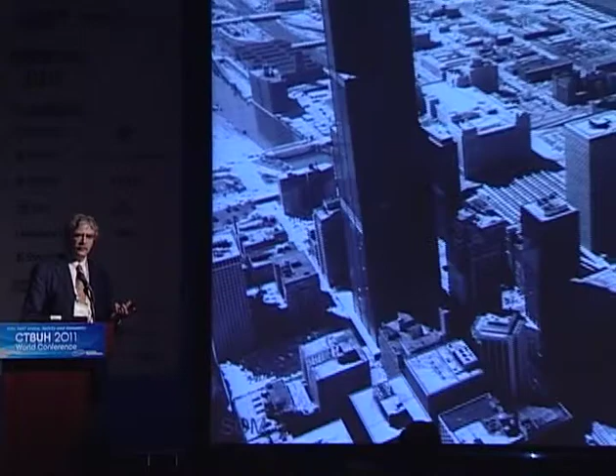I'd like to start by talking about a simple programmatic move to an existing tall building. This is the Willis Tower in Chicago, formerly known as the Sears Tower. We think about tall buildings and the effects on cities and developments, but one of the things I think we should consider is the change in typology over time and what small programmatic changes may mean to the use of a very tall building.

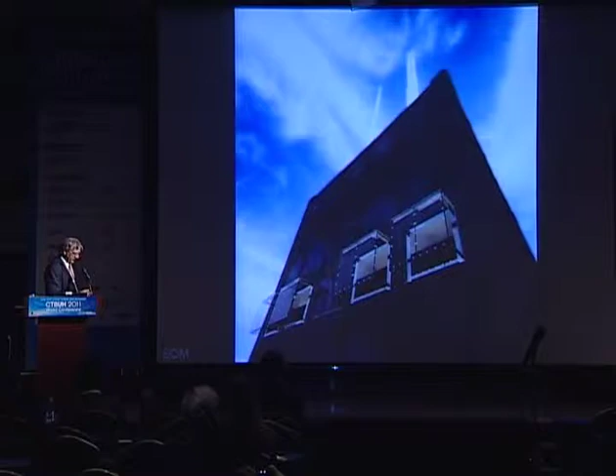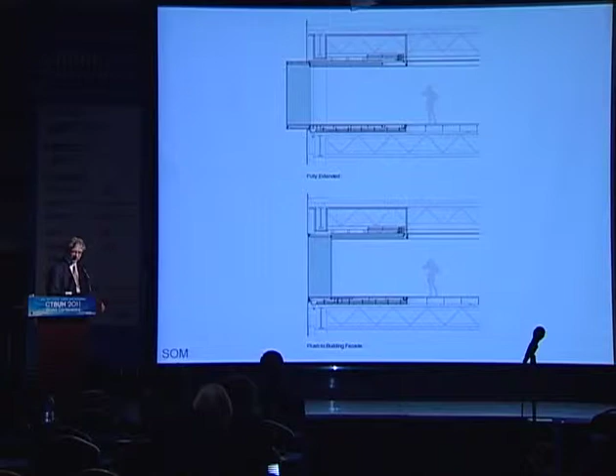So the idea was to introduce a way to re-experience the observation deck of the Sears Tower. The concept was to create a module that could be moved outwardly and then moved back to allow window washing, and to allow the structure to maintain its original design intent. These modules are actually quite small.

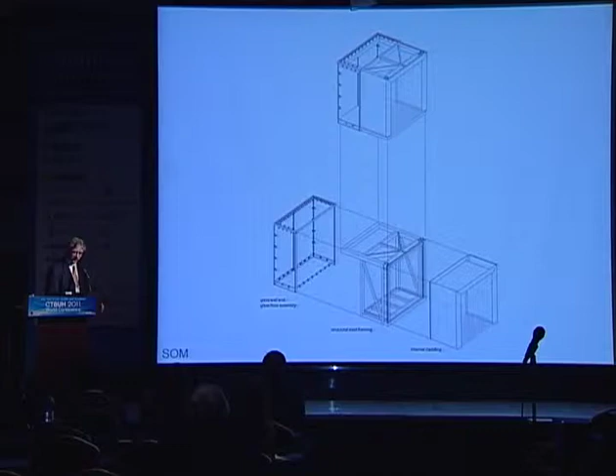There's a steel frame, and a triple glazed glass unit that is inserted and hung from the frame. The idea is that in some ways it's a temporary solution for creating a different experience for people at the observation deck level.

It's on the west facade only of the tower, because of the straight shot of the exterior wall from top to bottom—there are no setbacks below this western face. The concept was to allow people to experience the Sears Tower in a much different way, to be almost on the roof level without any barrier.

The experience would be different, integrated with the surroundings, with nighttime and daytime offering different experiences. But it's a very simple idea, a very simple move to create a different experience.

What's happened in this case is that almost immediately after the ledge was installed, as we call it, there were 10 times the amount of people interested in visiting the space at the observation deck level.

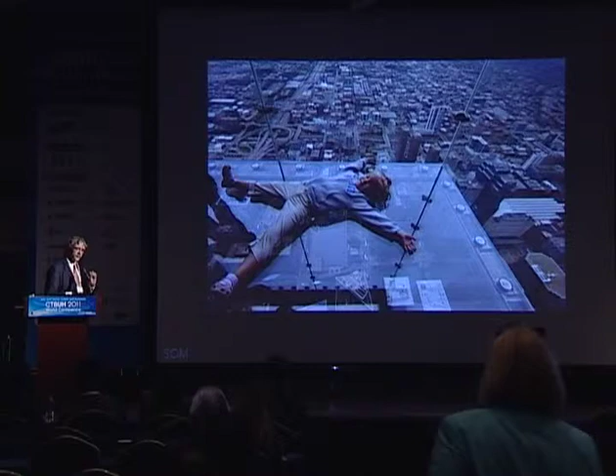So I leave you with this thought on this project: it's about daring ideas. I'd argue that when we think about tall buildings, we should think about spaces, and about what brings people to those buildings. I think we've done a lot of buildings that miss opportunities, and this is perhaps a small way of reminding us what it might mean to create simple, important moves to the typology of these tall buildings. When we think about structures, I think we're restricting ourselves far too much.

The work we're considering at SOM looks at structures at a finer scale, perhaps more of a mesh type scale than a beam and column or large mega scale—the idea that elements are purely in tension or compression, not bending. In response to gravity, wind, and seismic loads, you in fact come up with the most optimal design and the least amount of material in the structure.

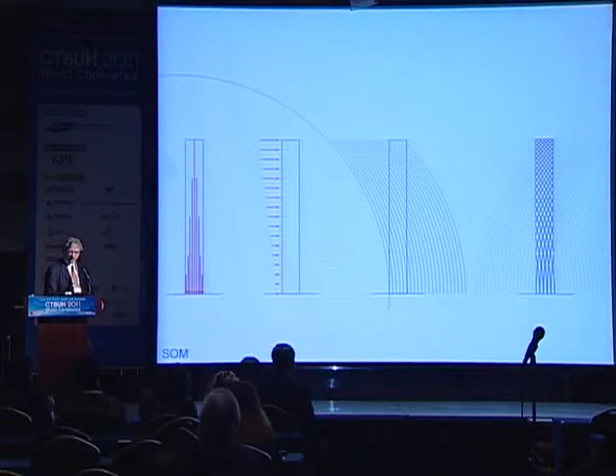It's about a typology. It's about understanding force flow, and it's about optimizing the structure to respond to that force flow, whether it's gravity loads or lateral loads.

We've looked very carefully at genetics in terms of the random association with material and boundary conditions—whether it's the geometry of the tower, both plan and elevation, whether it's fixed conditions at the base, or change in geometry over the height of the building. We're looking for the most optimal way to combine the applied loads against the minimal amount of material.

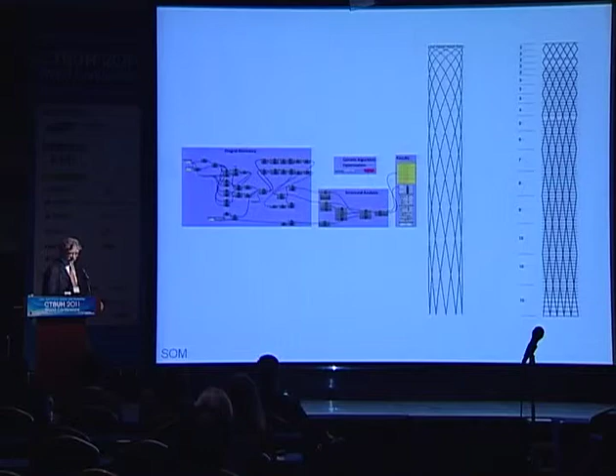So, freeform—I think we're on the verge of defining structures that are far less rigorous than they were in the past, and perhaps solutions that will be far more beautiful as we go forward.

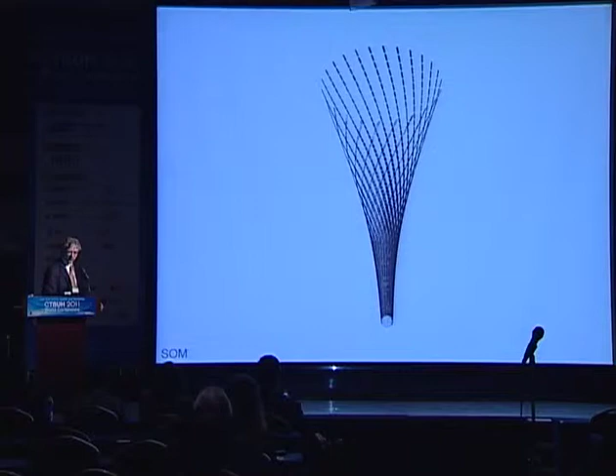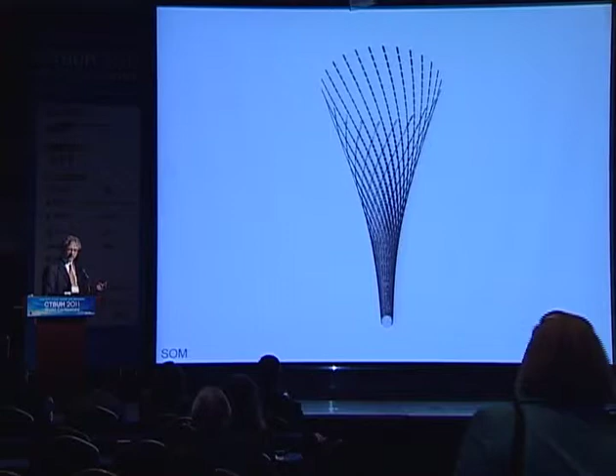I want to talk about towers that have limited program—the idea that we introduce these objects, these structures, in a way that creates and manages energy. In this case, we called it the Oasis Generator, a structure that could use concrete in the center.

It could erode as we got toward the top of the building, changing shape—in this case 9 meters in diameter at the base and 30 meters at the top—using the principles of tension on the outside and compression on the inside to resist overturning. And a concept of moving people from bottom to top, perhaps in modules that move around the perimeter of the building.

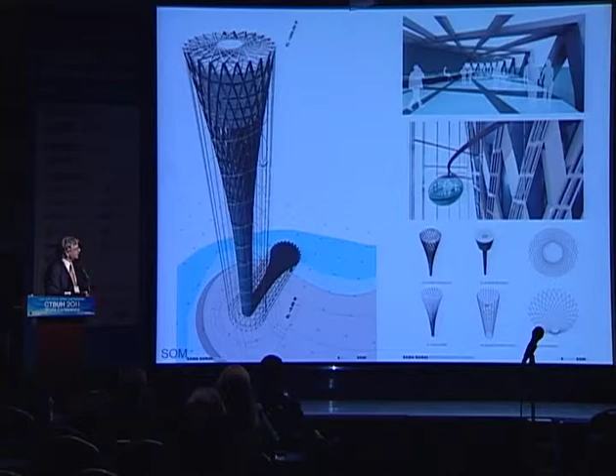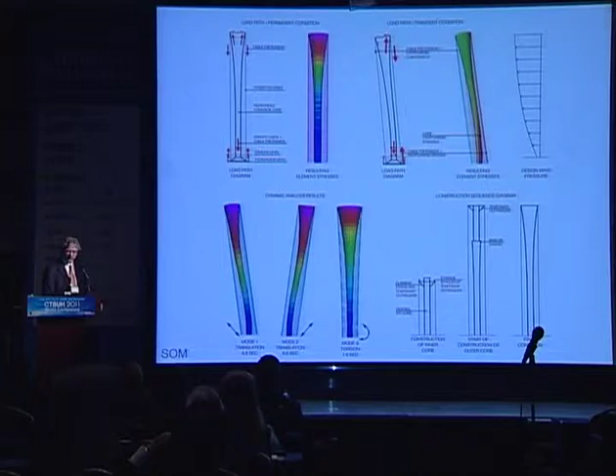It uses again the idea of least material and limited programs, so the top of the building is essentially where all these spaces would exist. Structurally, a very efficient idea—as forces flow through from top to bottom in the center core, there's greater density. We use high-strength cables around the perimeter of the tower to resist the overturning, combining compression and tension in the purest sense to reduce the amount of materials.

The other idea is to use evacuated tube systems attached to the inner core to generate and capture heat, then use that heated water to desalinate water coming from the neighboring environment. This is a site in Dubai, which the concept was originally developed for.

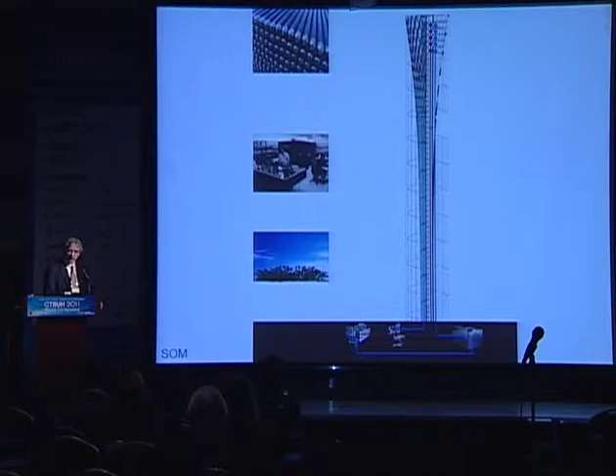The other idea is that as air moves through the center of this shaft, turbines could be used to generate electricity. So beyond the limited program, the idea would be that it would provide energy, and in this case, desalinated water.

Our structures are filled with opportunities. I'm convinced that as far as exterior wall systems, we're only scratching the surface. There's a huge missed opportunity, in my view, as to what we can do to capture energy from the sun, perhaps in this concept, using winds that are affecting the tower in a positive way.

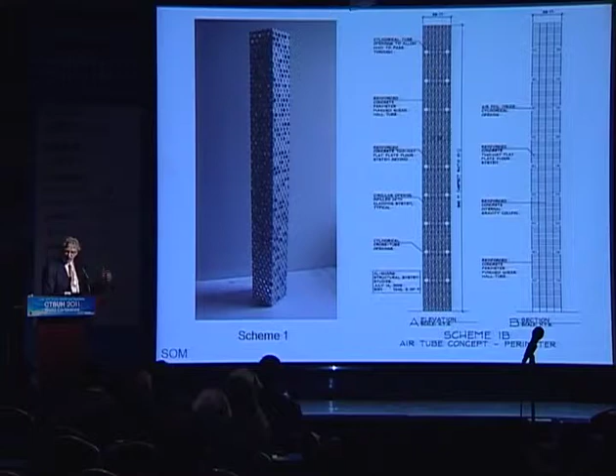So the idea is perhaps to introduce openings along the height of the tower, but not just to allow winds to pass through—an idea that uses a technology we see all the time, the use of airfoils, whether in automobiles or airplanes. We know there's lift and drag associated with airfoils, and we know that the flow around the towers is something we can actually take advantage of.

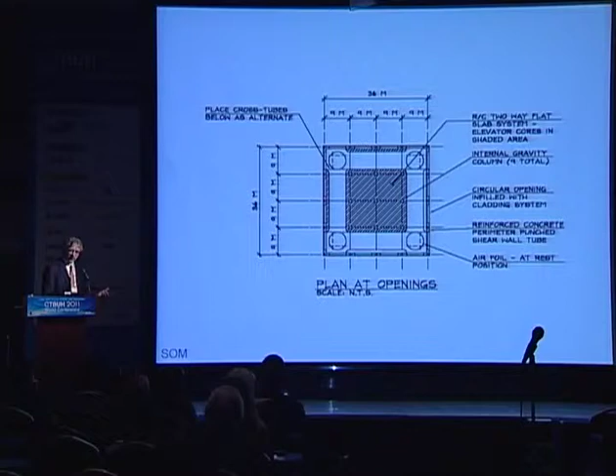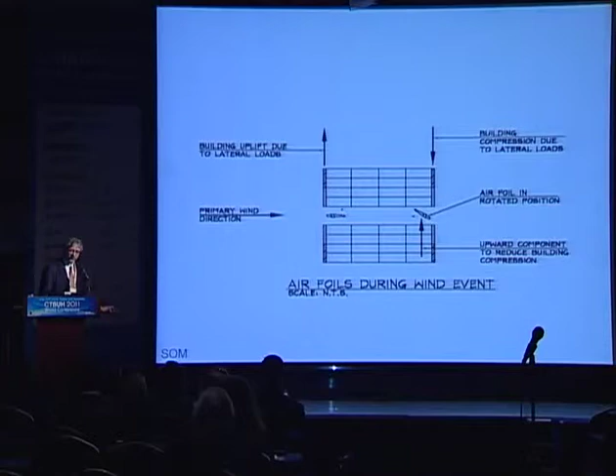Perhaps we introduce these openings, and instead of just pass-throughs and turbines, we have foils. These foils can be used to provide resistance—applied loads, when engineered properly on the leeward side, would form uplifts that counteract the overturning, using the passive characteristics of the wind to develop forces within the structure to create resistance.

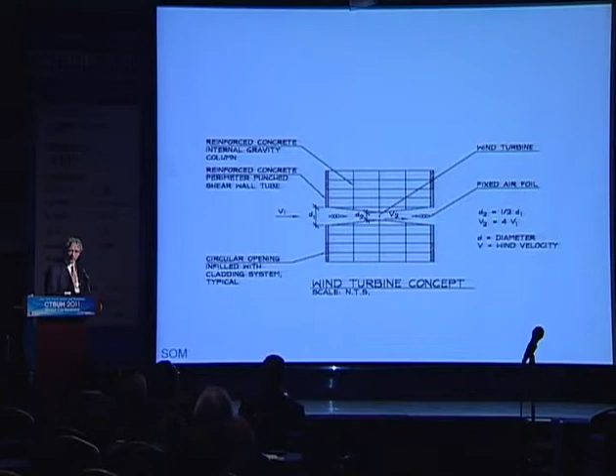And perhaps reducing the diameter of these openings as we pass through the tower to increase velocity, increase the amount of energy, the power that's generated by wind turbines that could be created within.

Our cities are in trouble, and we talk about tall buildings, the urban habitat. I think one of the things we're missing—I'm a structural engineer, but I work in cities, I've lived in cities—is the opportunity of the urban habitat. I think there's a huge opportunity to develop ideas that parametrically model cities in a way that looks at the environment.

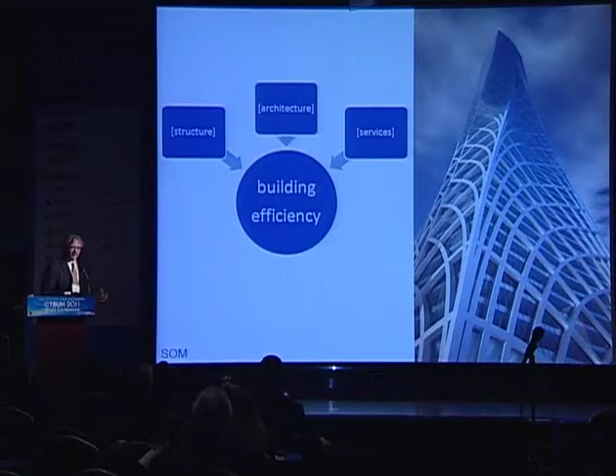So when we talk about cities, when we talk about structures, I see that there are primarily three components when we talk about building efficiency: there's the structure, there's the architecture, and then there's building services. Every built environment has got structure.

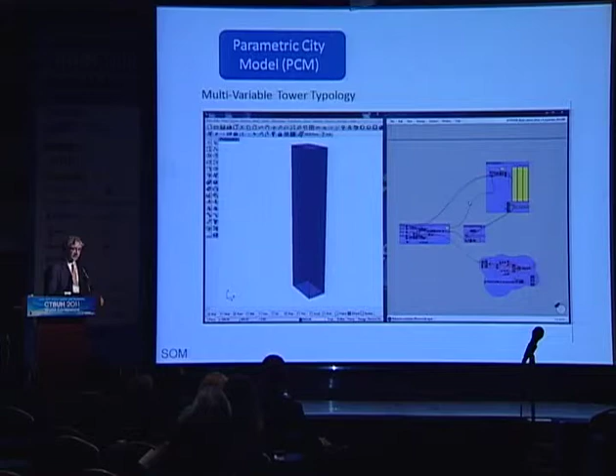So what we've been looking at is parametric models that take the tower and try to come up with early ideas about what it might mean to change certain parameters in the structure, and see what it means in terms of efficiency—taking advantage of the occupied space.

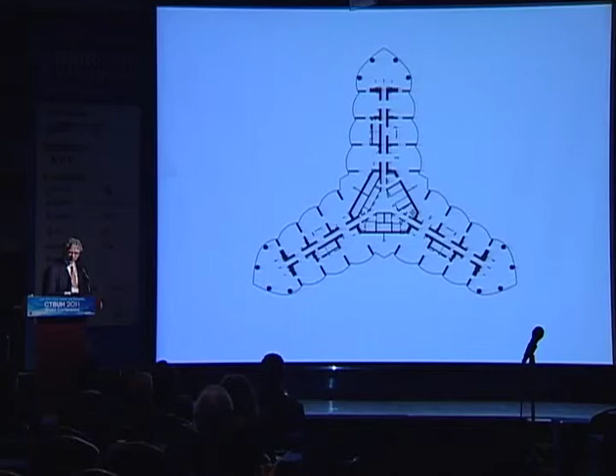So as an example, the Burj Khalifa—you've seen this before, the floor plan. This is the occupied area overall, the structure, the services.

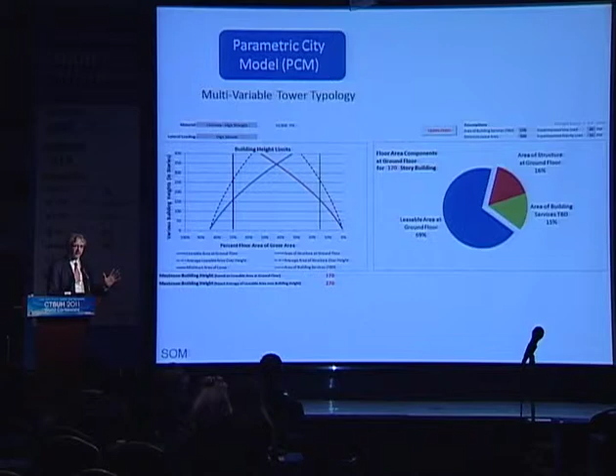Now, if we look at this in a way that allows us to come up with limits—how tall can we build? This is what I'll call a typology model that looks at building height and its components: the structure, building services, and then what's most important, I think, at least in the early stages of design—forget about aesthetics—it's leasable space. What is the quality of the space? What is the value of the space?

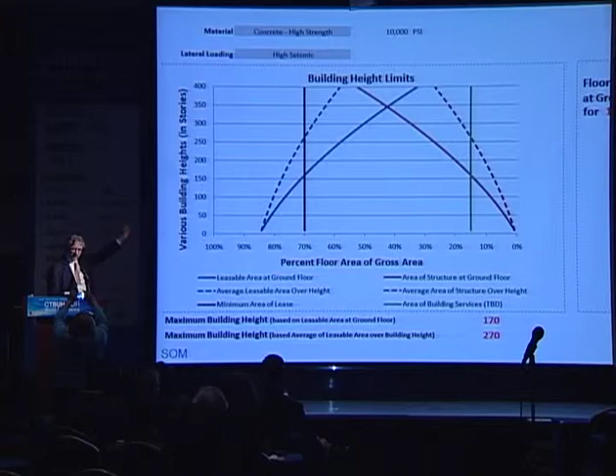I'm just going to look at the left side of this graph because there's a lot going on. But in our towers, if we target the minimum allowable leasable floor space that we'll accept for design, let's say it's 70%. If we look at the structure, we assume a certain amount of material strength—perhaps the building is in an area of high seismicity. All this means is there's demand on the structure that creates structural size. It's not a beam and a column and a wall—it's a material, and based on the allowable strength of that material, there is a size, an area that is there to take up the space.

So we can look at the structure over the height—this is various heights of buildings. The blue solid line is leasable area at the ground floor.

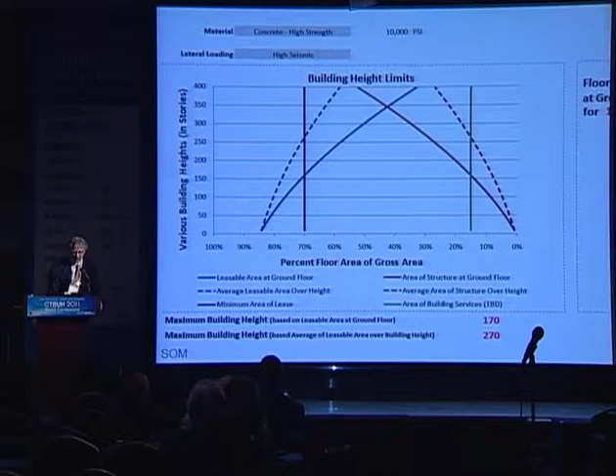If you look at the intersection between the height and the 70% efficiency, it means that for this building with 10,000 psi concrete in a high seismic zone, you can build it so the ground floor has a leasable area of 70%, reaching 170 stories. If you look at the average area instead, accepting a lower percentage at the base but averaging 70% over the height, you can build to 270 stories. It's a way to create a metric, a starting point that looks at efficiency.

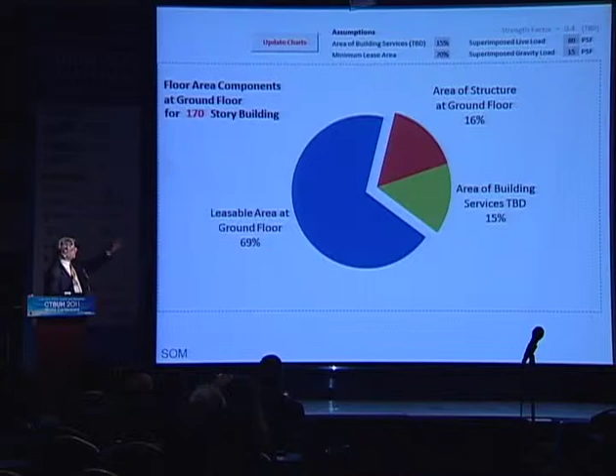Building services, in terms of the floor plan of the Burj, is approximately 15% of the area. It may vary over the height of the building, but it's a starting point. You can also look at things like applied loads that affect the structural size.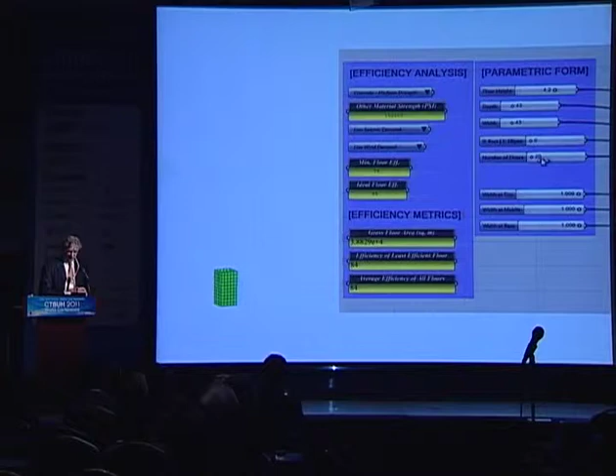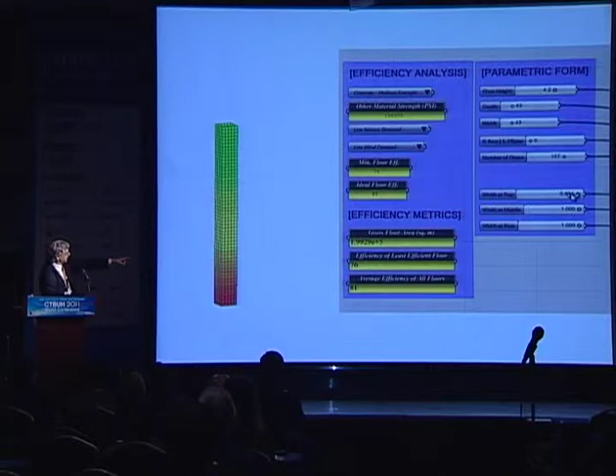What's important in modeling this is what it means to change shape, to increase the height. In this example, we're changing the height of the building. We've set a minimum floor efficiency of 75%, with an ideal floor efficiency of 85%. The gross area changes, and you can see the efficiency of the least efficient floor changing. As the building gets taller, demand is greater and the structure takes up more space. If I change the width, it also has an effect.

Red means I'm below my minimum threshold. Green is good, meeting my minimum threshold. This is a way to take cities at the very early stages of design and parametrically model them so that we understand what we're getting ourselves into.

We can look at different things like concrete strength. With higher strength concrete, the poorer areas tend to disappear. With steel, the section sizes may be smaller. When we look at higher demands like wind or seismic, the red areas increase.

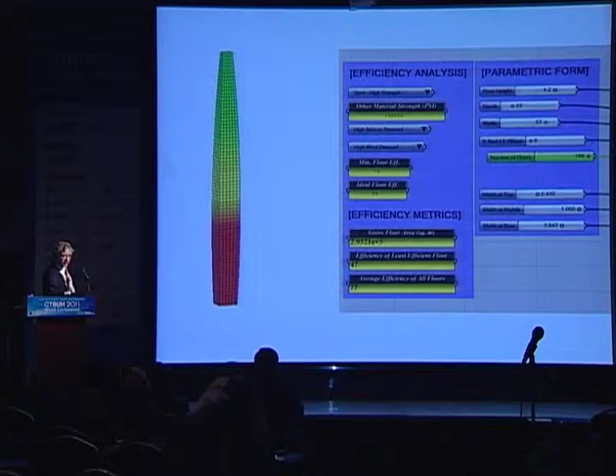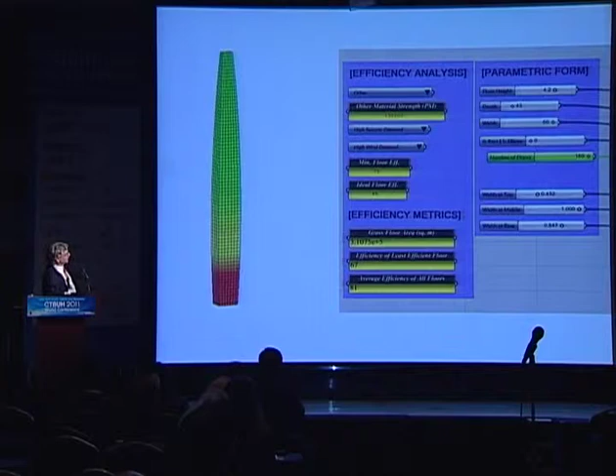Now you can also look at a material of the future—other materials. It may mean super high strength steel or concrete, or treating it in a way that's far more efficient in terms of compressive strength. In this case, we're modeling it as a super high strength material that might be related to concrete.

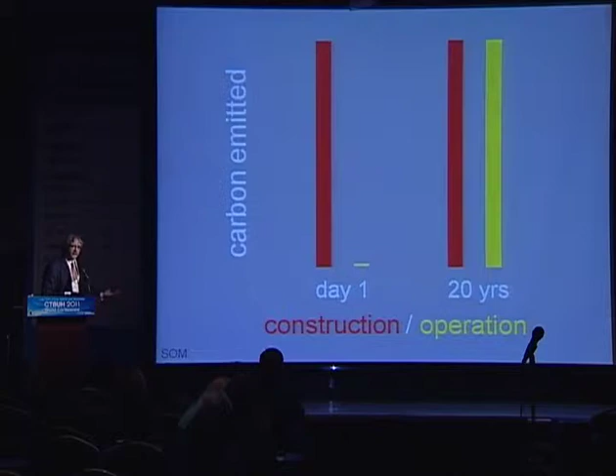The day we build structures, it typically takes 20 years before the operation catches up with the carbon emitted on the first day we build the structure. So it's important that when we build, we think about the material, the construction, and the damage the structure might see. The idea is that over the life of that building, if we have enhanced seismic systems, the damage due to seismicity could be reduced, and so would the carbon.

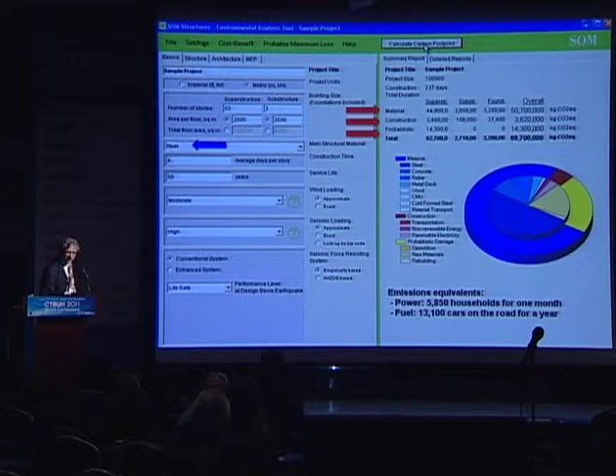This idea links to that program: very early on, if we know whether it's steel or concrete, the number of stories and so forth, it looks at a database of projects we've designed. For a certain number of stories in a certain environment, we can expect a certain amount of structural steel or reinforced concrete—getting to the material, construction, and probabilistic damage based on the structural system, again looking at the environment relative to that parametric model.

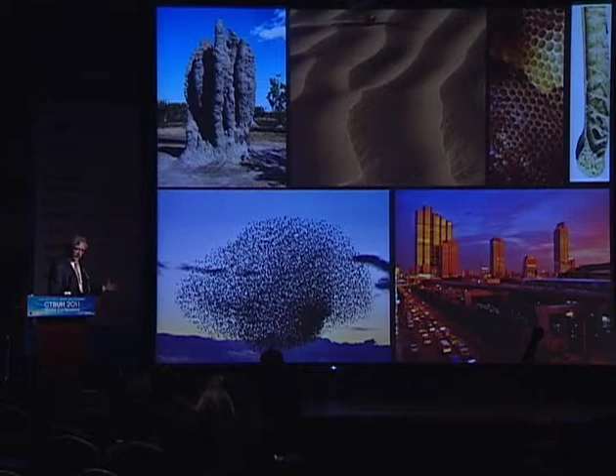The last thing I want to say is that there's a wide open opportunity here about freedom of thought regarding structures and architecture. I think the idea of emergence is really important—the idea that individual common elements are far more powerful working together than acting separately. We see it in birds in flight, in cities, in the idea that people living together and interacting, like we are today, is far more powerful than if we were on our own.

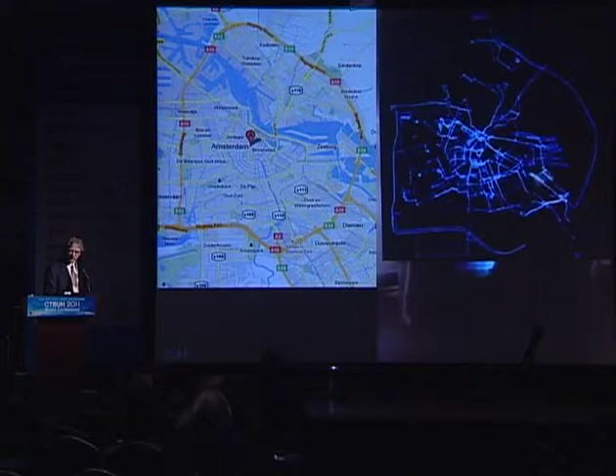So what does that mean? Amsterdam did a study tracking the movements of people within the city over time using GPS tracking devices. The interesting thing is people moved where they were told, based on the rules of walkway and roadway systems within the city. My argument is: should we be bound by the column lines and beam lines we draw for our structures, or should we be looking at the spaces in between? Are we saying the spaces in between in that city are not effective? I think it's the same idea for our structures and how we think about material and the use of material.

There's interactive art—in this case in Doetinchem, called the D-Tower project—where the entire community participated by entering their moods each day. Red may be anger, yellow happiness, blue sadness. People could interact, the idea of emergence, people working together, understanding the mood during that day. And if you didn't participate, you understood the mood of others who were.

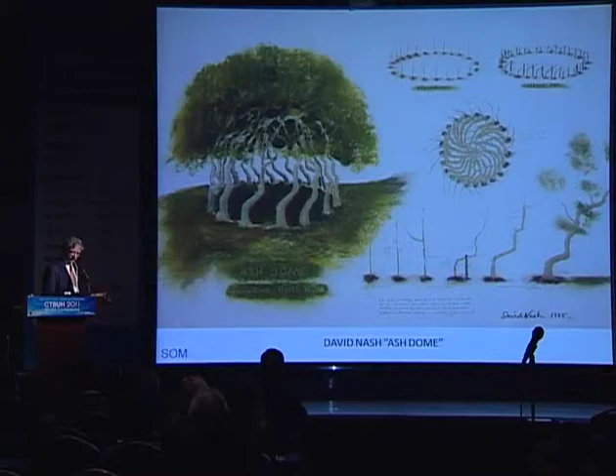You can control this. This is not something that just forms purely by nature. You can change the boundary conditions. David Nash in Ash Dome changed the boundary conditions by putting weights on these trees to create this dome, creating this new form that was imposed with a superimposed idea. It's about alignment of material, and forms that we can't quite rationalize initially.

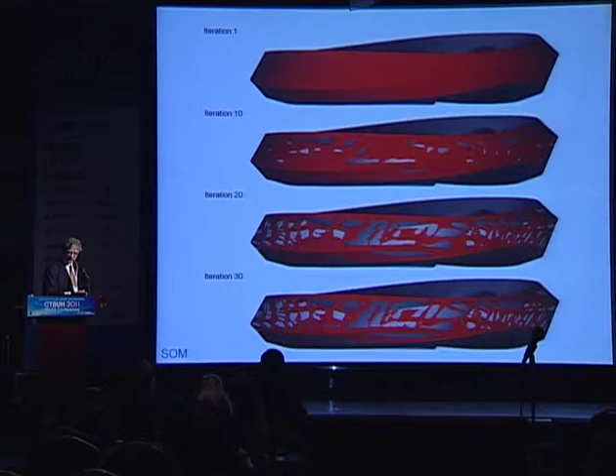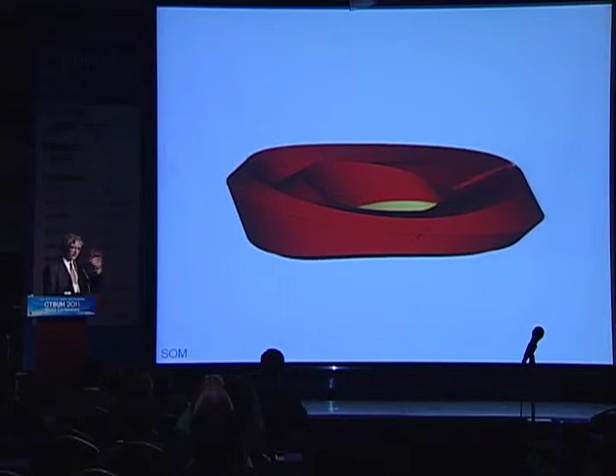It's about where material is needed based on forces, based on support conditions. It's based on thinking about structures three-dimensionally, volumetrically, rather than on surfaces. So how many of us think about the structure through the space rather than just at the perimeter of the space? I think the solutions are wide open, beautiful.

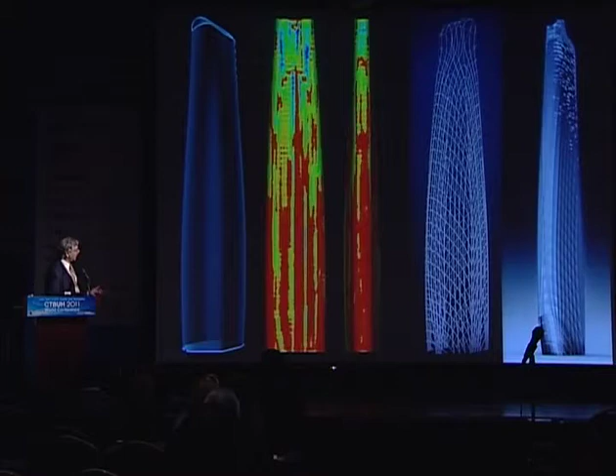It's about the material that you need, not the material that you just place there because it's something we do in construction. It's about the erosion of material. It's about using concrete in a way that's more fluid. It's about support conditions at the base of a tower. It's about loads that are applied, and the flow that happens, red being the highest areas of flow and blue the least. And then there's a rational solution that may come from it in terms of the structure and the architecture.

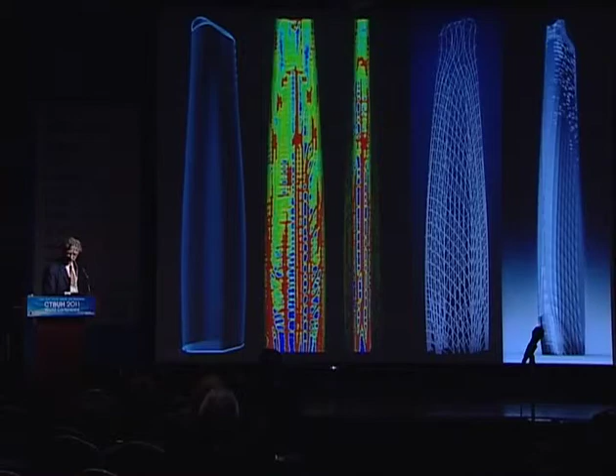The last thing I'll say is, I think it's about flow. One of the things we're looking at is the placement of material in structures that perhaps can be altered over time. The best example I can give you is a state change - water that's changed to a solid. There's a change in properties that can happen, and what we're looking at is using different means to perhaps change the characteristics.

To change the characteristics, to use the absolute least material - gravity is something that, at least from what I can understand, we can't change. But wind and seismic forces and other forces come and go. So the idea is to move material within systems and perhaps change material properties to resist those forces. So that's what I have. Thank you.